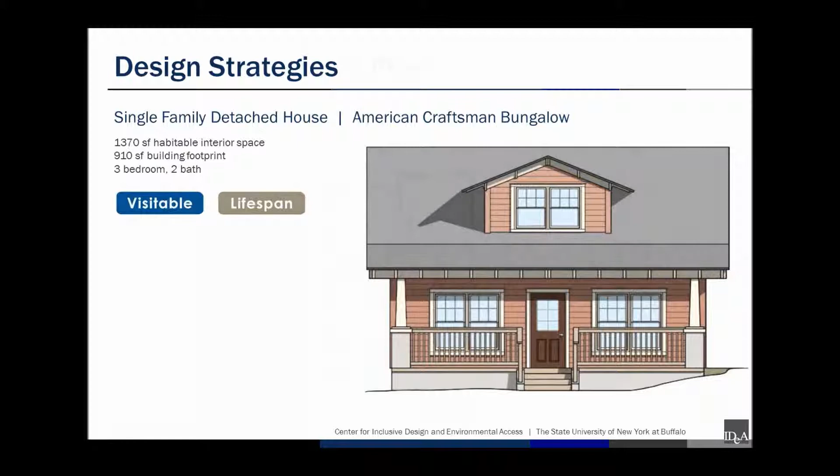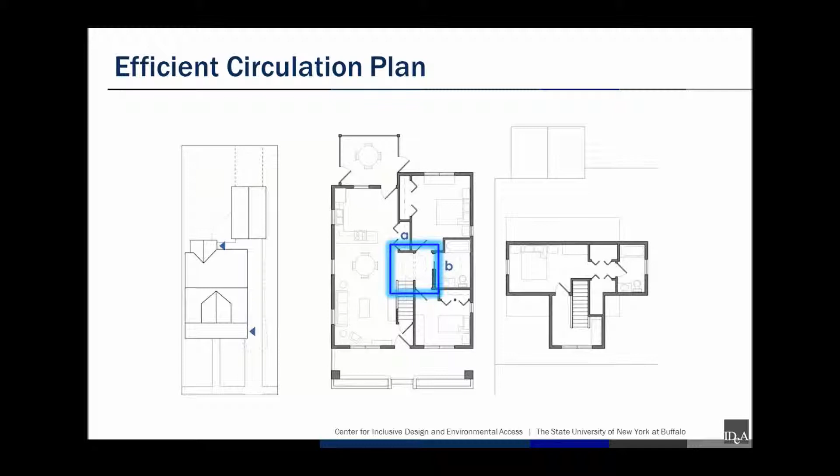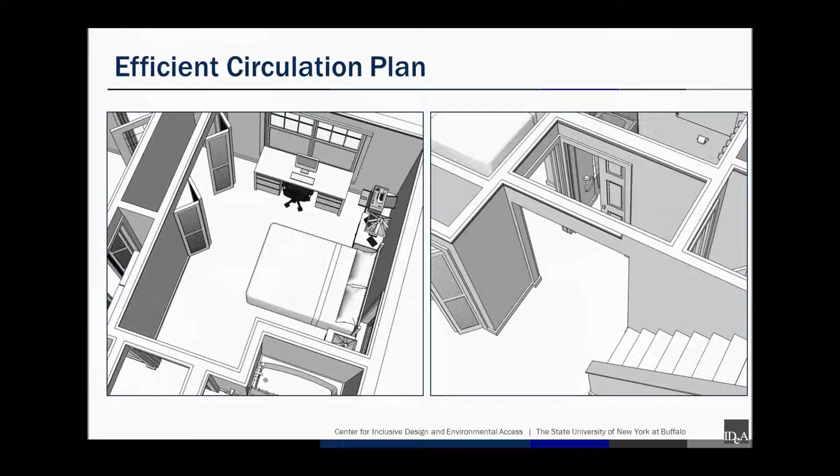So what do we need, specifically? What's the minimum we would need to do for visitability? You would have to have at least a half bath, and you would want to be able to fit a wheelchair space inside of that, and that's your standard 30 by 48 wheelchair space, or whatever the metric equivalent of that is. A half bath that's about 60 by 60, or 152 centimeters, should be able to do that. In this case, the toilet dimension is critical for whether the wheelchair space can fit in the bathroom.

ANSI Type C has some more specific requirements. Basically, they talk about the toilet needing a 56-inch deep by 48-inch wide space. But the sink can encroach upon that space as long as the center line of the toilet is 15 inches from that sink. What you probably don't want to do is have one of the half baths where you come in the door centered with the sink to one side and the toilet on the other, because then there's no way to really get that 30 by 48 in there to turn. So you'd probably want to put them next to each other like this to maximize your space.

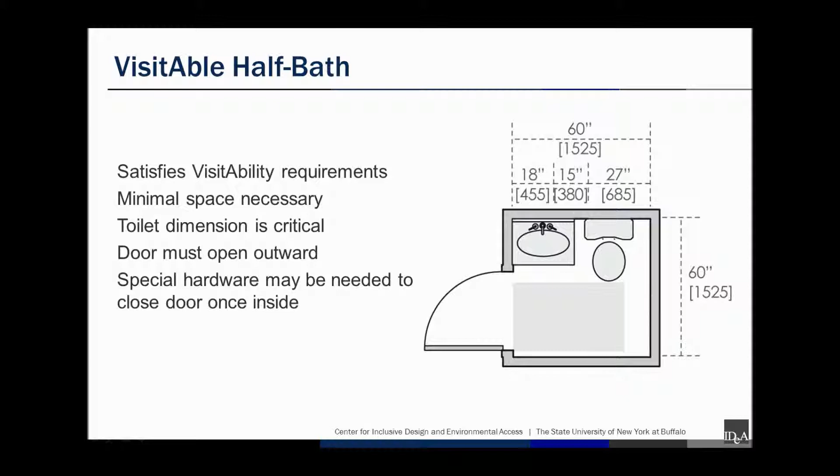And then there's a couple other things. The door you want to have open outward, obviously, so you can close the door while using the bathroom. And then you might want to consider putting some special hardware on the inside of the door, although the family can really do that later on. But it's tough to reach behind you and close the door, so you can put like a U-shaped cabinet pull if you wanted on the inside of the door.

And so to get into a little more detail about the toilets, the top would save the most space. Again, there's that 48 by 56 inch space. It's 15 inches from the sink there. This approach takes the least amount of space, but it means a greater transfer distance. Now the one on the bottom also works for visitability. It takes up a little bit more room, but also allows a forward approach to the toilet or to the sink. So if you wanted to have knee space under your sink, you might want to use this one.

But this also would require a wheelchair user to be able to do the stand and pivot transfer, which not everybody can do, but also not everyone can do the one on the top. So a really accessible home would allow for both options. So this one says, well, you should be able to use it, but not necessarily.

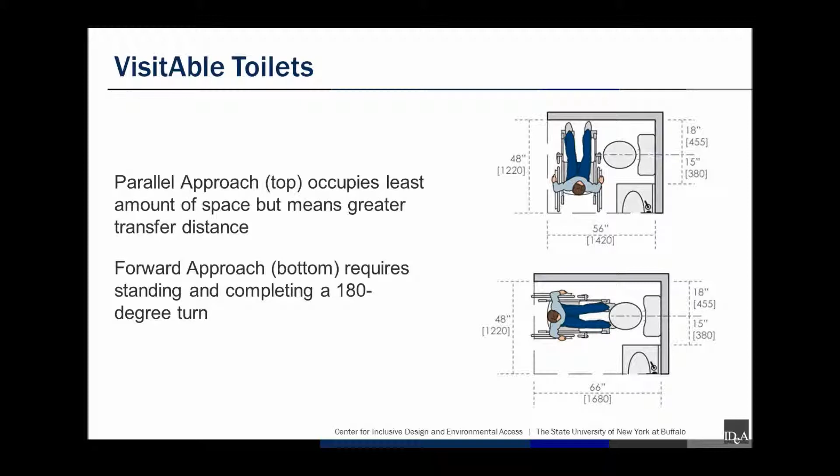And so here's an example too of a lavatory. The one on the left being the visitable lavatory. There's really no requirements in ANSI Type C in terms of the lavatory, but if you're going to have a lavatory, I would say you would want to center that clear floor space on the lavatory. Now the one on the left here has no knee space underneath, so you would have to reach to it from your side and turn, which isn't optimal. And so to show the difference between visitability and accessibility, the one on the right would have the knee space. The drawing on the right would allow for either approach depending on people's preferences.

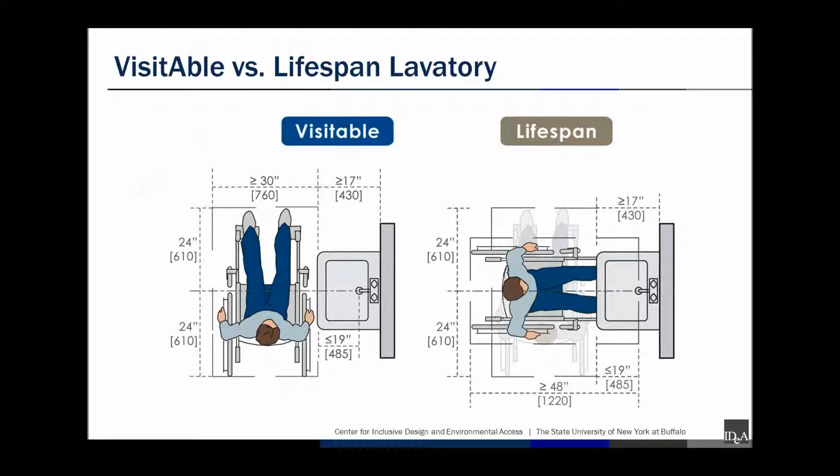Now, visitability aims to open up doors for two groups: one, visitors, and two, temporary accommodations while changes are made or due to a temporary disability like a broken leg. Now, visitors might not always be taking a bath in the home they're visiting, and that's why it's not required in terms of ANSI Type C or visitability. But someone with a temporary disability may need to, or perhaps a disabled child or other family member who's visiting and staying the night at a relative's home might want to take a bath. So if there's a bath on the first floor, I would make that the visitable bath.

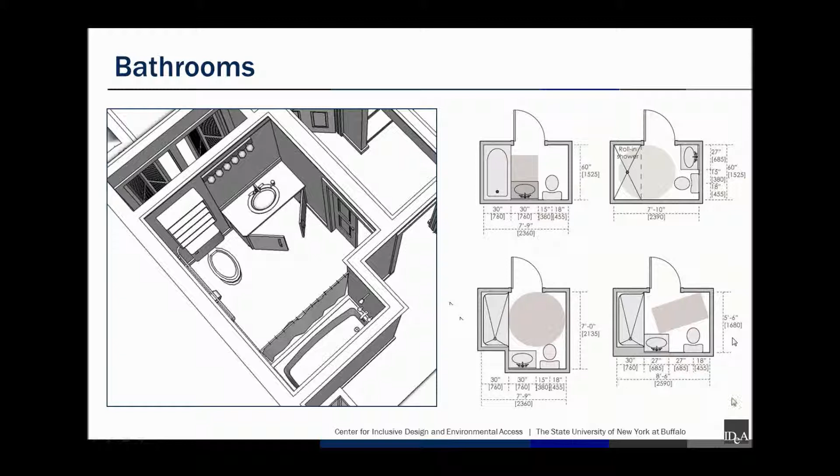And there's really no extra requirements for that, like I said, because it's not required. But this example here shows how you could do it. So we have a few floor plans here that show how you could make that bathroom a little more accessible if you do have a full bath. But basically, in terms of visitability, the only requirements that are going to remain are the space around the toilet and then the fact that there would be a sink in the room. Again, all the doors you would probably want to have open outward. Basically, I think a lot of these baths here would meet what we would call the Type B requirements of ANSI.

Now, a lot of the visitability guidelines are pretty easy to handle. Wider doors, I don't really need to go over. They don't require a whole lot of explanation. Make them wider. And I just spoke about bathrooms, but the thing that most people have questions about is the zero-step entrance. A zero-step entry is usually achievable with grading. It doesn't necessarily result in extra cost unless a retaining wall or off-site fill is needed. But again, also the excavation, if a full basement is desired, and the house needs to be a little lower to the ground.

Now, there are a few things you can do to provide this zero-step entry. The first is to use an entrance that will be on the leeward side of the building. And this will help prevent wind from driving water towards the opening. Two, use a covered porch or patio for your visitable entrance. And again, this helps keep water away from the opening. Three, work with the grade or design the grade to minimize the height of the first floor. And this is the most important thing where cost can get involved.

But what this does is allow a shorter ramp to still be at an acceptable slope. And so you sort of have to do a cost-benefit here. How low can we lower the ground? How much more do we have to dig down? Versus the cost of installing a short ramp.

And so a lot of times, and you'll see in some of the examples later, the house will be lowered a little bit, but there'll still be a little short ramp there, because perhaps at that point they figured if we leave it up too high, the ramp will start getting too long, it'll outweigh the cost, or we just don't have the space.

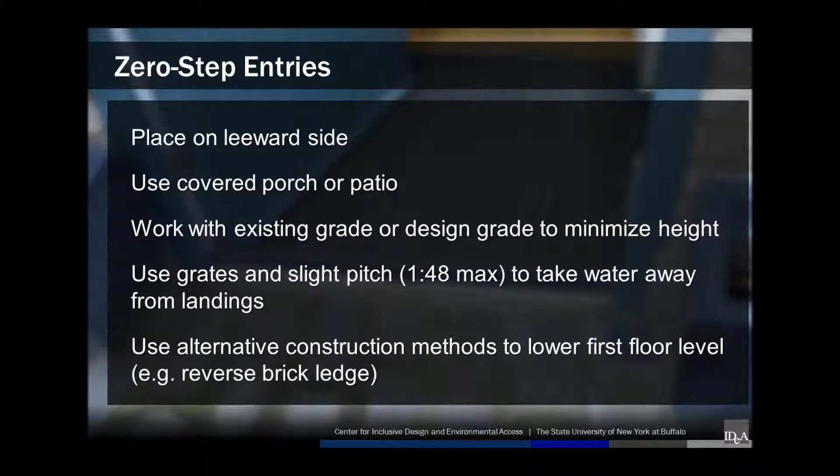The next thing is a landing outside the door. You can have a slight pitch to that landing, about 1 to 48, which is for all intents and purposes considered level by most standards. You can also have a grate that allows water to pass through, which I'll show you in a second. And you can also use alternative construction methods, which I will go over a few of in a minute or two. So first we'll start with the lot planning.

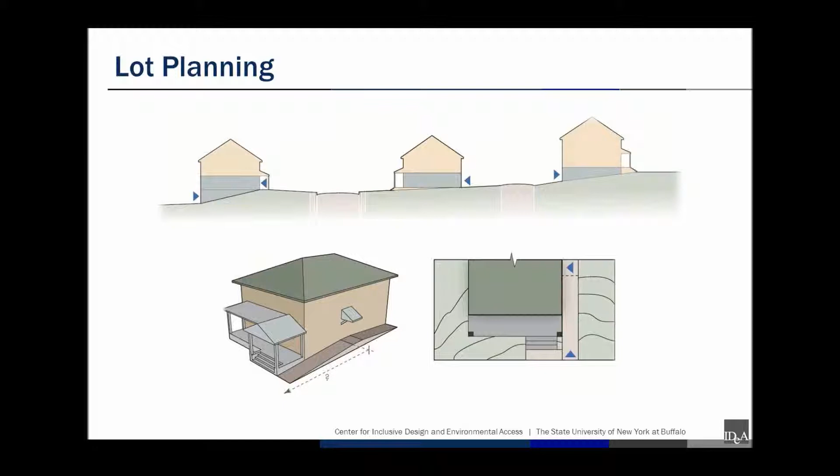Now, if you do this, I would say that the loading area at the vehicle should be about a 1 to 48 slope maximum, and then the ramp would be 1 to 12. But the driveway can be steeper than that so long as the unloading area is level, and then you would go up 1 to 20 from there. So building up the driveway is a good part. It gets you part way there.

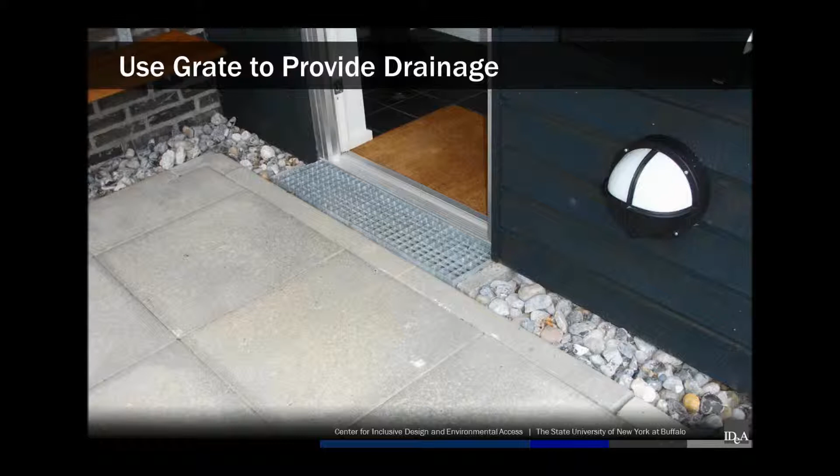Now, people are always concerned about water, and so I think the best 2 ways. The best way certainly is a roof overhang, but also placing it on the leeward side of the building. But one thing you can do if you're still concerned about water is to have this grate here that sits over the drainage stone, so water passes through, it doesn't accumulate and build up on it. But people could just roll right over that. So that's a great way of dealing with the water along the site.

You can also provide your zero-step entry on a deck, and just like with the example I showed earlier, you could have a grate at the door. Again, make sure it's on the leeward side. Have a roof overhang. So you don't have to necessarily worry about always grading the lot that much. You have your deck at the entry floor level. This way you can pick which side of the lot you need to grade.

So you don't always have to say, well, I have 2 doors and one of them is off of a pretty steep drop-off and I can't do a ramp off that. You build a deck there, and then the access to the deck can be from the side where the grade is a bit closer. So that's a good way, and or the driveway could just slope up to this deck.

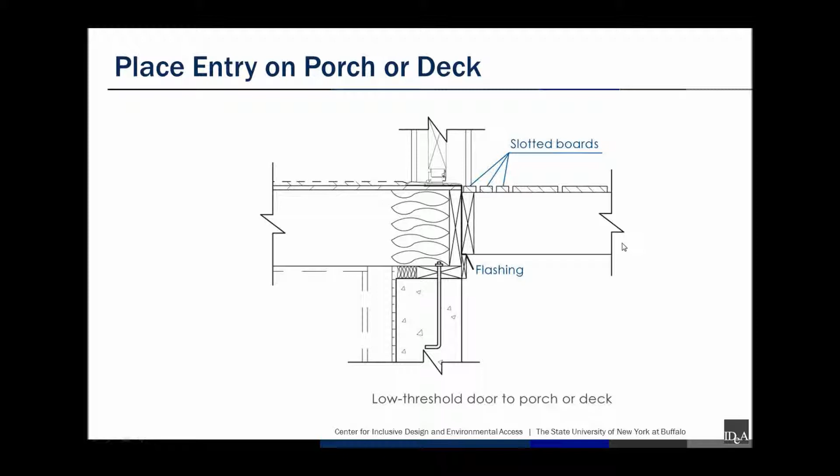Now, some alternative construction methods. One thing that comes to mind here is what I call the reverse brick ledge. Basically, when you do a brick ledge, instead of having the bricks go all the way down below the ground, which wouldn't be that cost effective, they bring the foundation up and they notch it, and they set the bricks on that notch. Here, we've taken the same idea and flipped it around, and we're using that notch to set the first floor on top of.